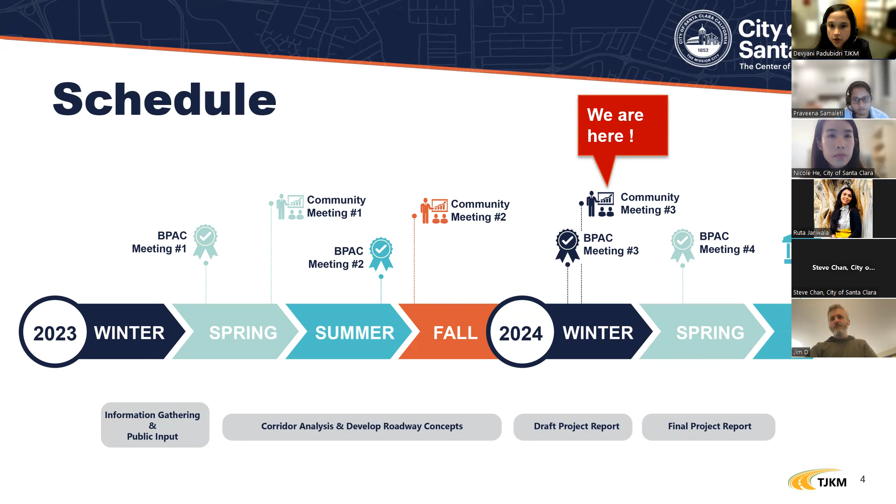The schedule for this project: we started in the winter of 2023. We've had 3 BPAC meetings so far and 2 community meetings. This is the 3rd community meeting. This will follow a 4th BPAC meeting and before the council adoption.

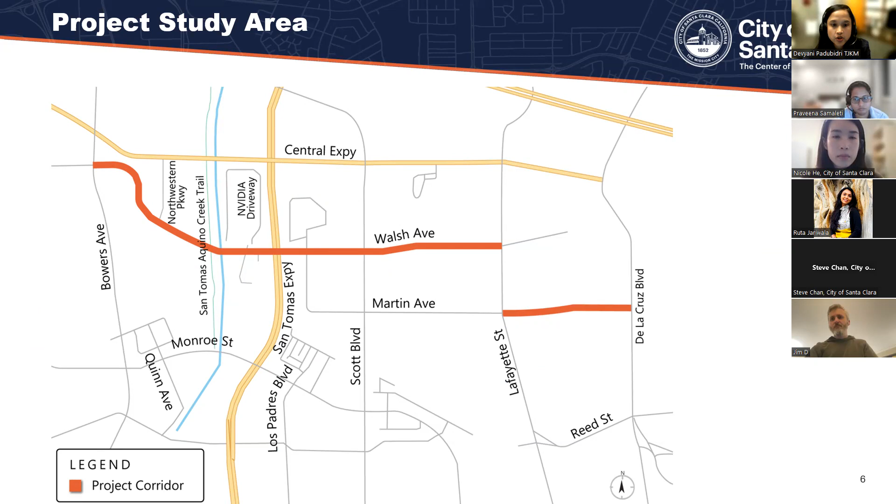The study area today: the project area spans on Walsh Avenue between Bowers Avenue and Lafayette Street, and on Martin Avenue between Lafayette Street and De La Cruz Boulevard.

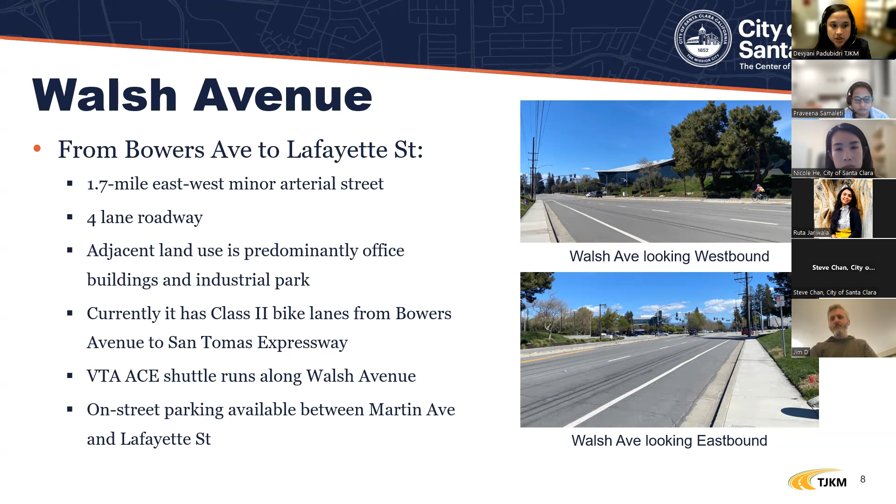The existing conditions: Walsh Avenue is a 1.7-mile east-west minor arterial. It's a 4-lane roadway, and the surrounding land use is predominantly office buildings and industrial parks. There is a Class 2 bicycle facility between Bowers Avenue and San Tomas Expressway currently. There is also an ACE VTA shuttle that runs on Walsh Avenue. On-street parking is available on both sides between Martin Avenue and Lafayette Street.

Martin Avenue, on the other hand, is a 0.5-mile east-west collector. It's also a 4-lane roadway. The surrounding land use is industrial and has parking on both sides.

The outreach efforts so far to publicize the project: we have put up a lot of yard signs along the corridor. We've also mailed out postcards inviting the public for community meetings. At pop-up events, we've handed out comment cards so that we can get feedback from the community. We've also set up a phone number to receive any voice messages on concerns along the corridor, and an email address to receive any comments and feedback based on the project.

Other outreach includes a project website on the city website. We also had a map input platform where the community could drop in points and let us know the areas of concern and report their concerns. We had set up a stall at the Bike to Work Day, and we were also at the Christmas tree lighting event and the Art and Wine Festival, where we got a lot of input on the different concepts that we had suggested, and in the community survey too.

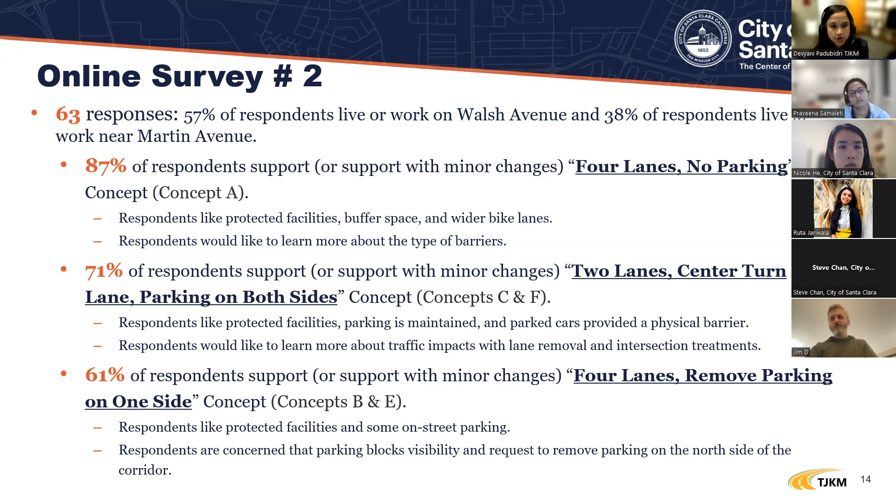We also asked the community what they liked about the concepts, and they said that they liked the proposed protected facility, the buffered spaces, and wider bicycle lanes. Some of their concerns included the type of barriers that were going to be used, the traffic impacts of lane removal and the intersection treatments, and also parking visibility.

Going over the design concepts and alternatives, we divided the study area into 5 sections. The first section is between Bowers Avenue and the 80 to 64 feet transition. The second section is between the 80 to 64 feet transition and the bridge section. Section 3 is the bridge section itself. Section 4 is between Martin Avenue and Lafayette Street. And the 5th section is on Martin Avenue, which spans from Lafayette Street to De La Cruz Boulevard.

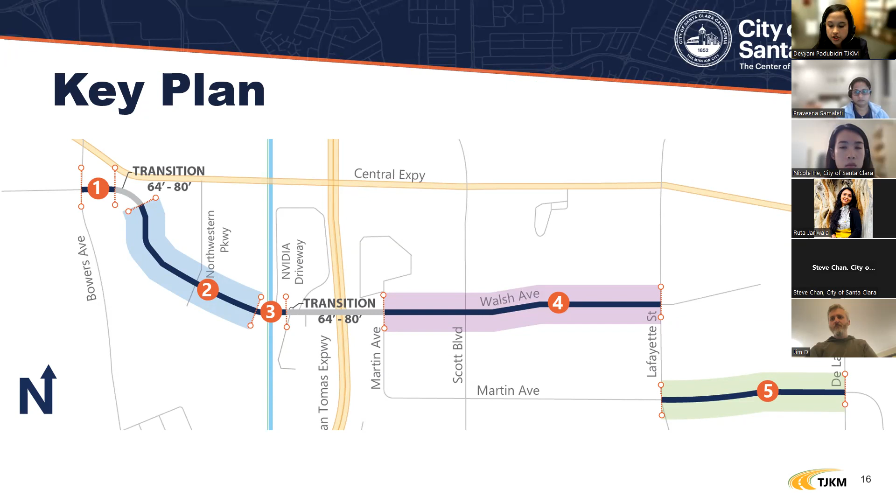Going over the Walsh Avenue sections to start. First, we will go over the existing conditions and then move into the concepts. The no build or existing conditions at section 1 are a 4-lane roadway with a center turn lane and no parking on either side. There is a 7 feet wide bicycle lane.

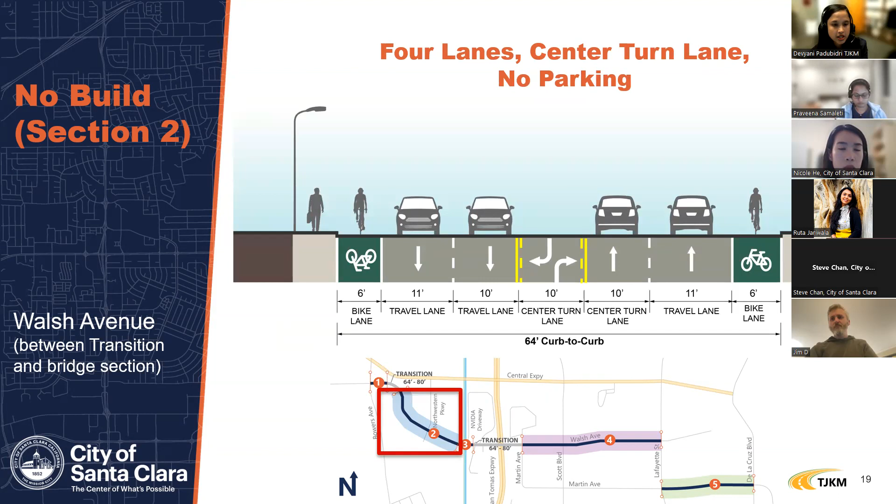Section 2, which is between the transition and the bridge section, is a 4-lane roadway with a center turn lane and no parking on either side. There's a 6 feet wide class 2 bicycle facility along this stretch.

Section 3 is the bridge section. It's a 4-lane roadway with a center turn lane and no parking on either side. The outermost lane is a sharrow, which means the bike and the cars share the lane.

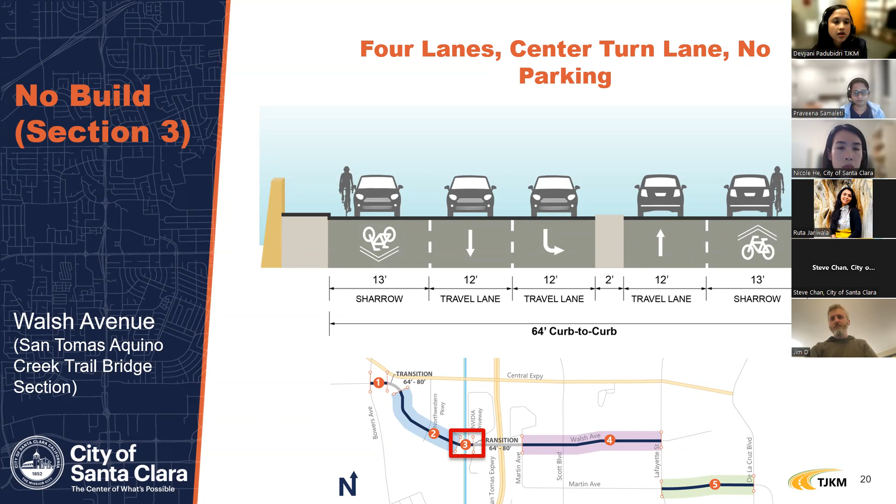Section 4 is a 4-lane roadway with parking on both sides.

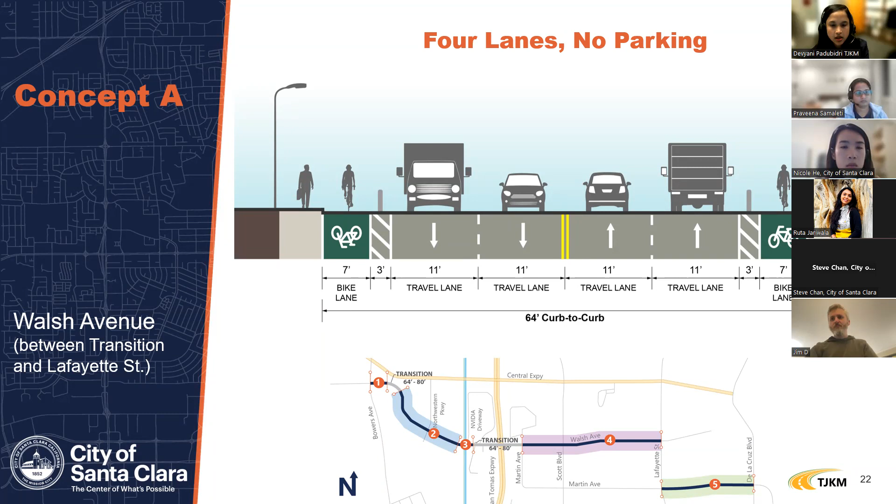Moving on to the concepts, our first concept for Walsh Avenue is a 4-lane roadway with no parking on either side. We have a class 4 bicycle lane, which is 7 feet wide with a 3 feet wide buffer.

Concept B is a 4-lane roadway with parking removed on one side between Martin Avenue and Lafayette Street. This is the stretch. For the rest of the stretch, which does not include parking, there is no parking at that stretch.

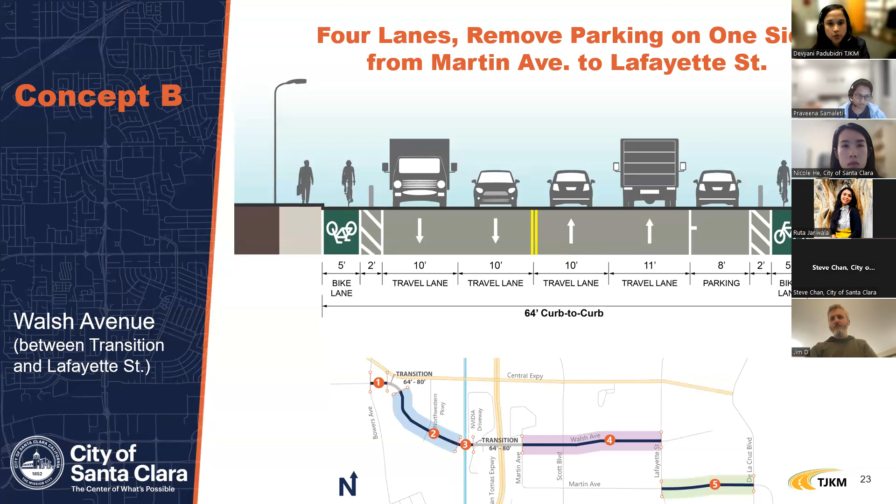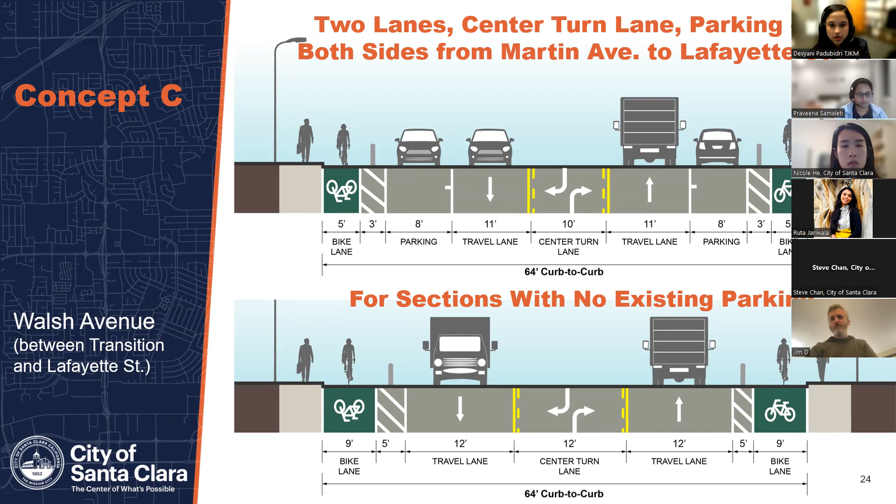Concept C is a 2-lane roadway with a center turn lane and parking on both sides from Martin Avenue to Lafayette Street. For the rest of the stretch where there's no parking, the section below is what would be implemented. The bike lane will be a little wider and the travel lanes will be wider as well.

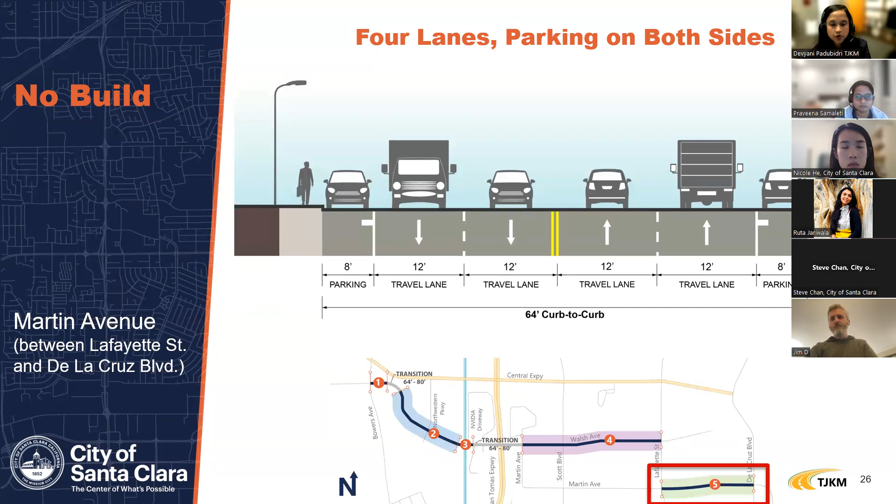Moving on to Martin Avenue, it's section 5. The existing conditions are a 4-lane roadway with parking on both sides.

Concept E is a 4-lane roadway with no parking on one side, and class 4 bicycle lane on either side, which is a 5 feet wide bike lane and a 2 feet wide buffer.

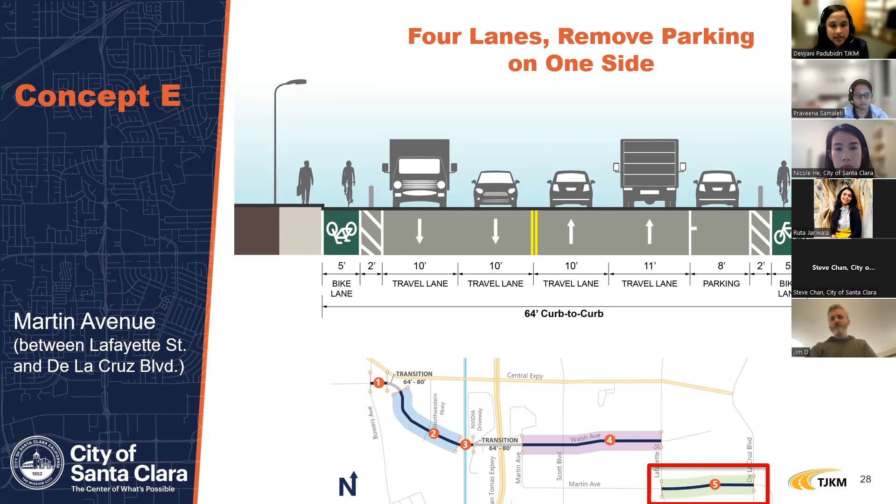Concept F is the third alternative for Martin Avenue: a 2-lane roadway with center turn lane, parking on both sides, and it incorporates a class 4 bicycle lane on both sides. It's a 5 feet wide bike lane with a 3 feet wide buffer.

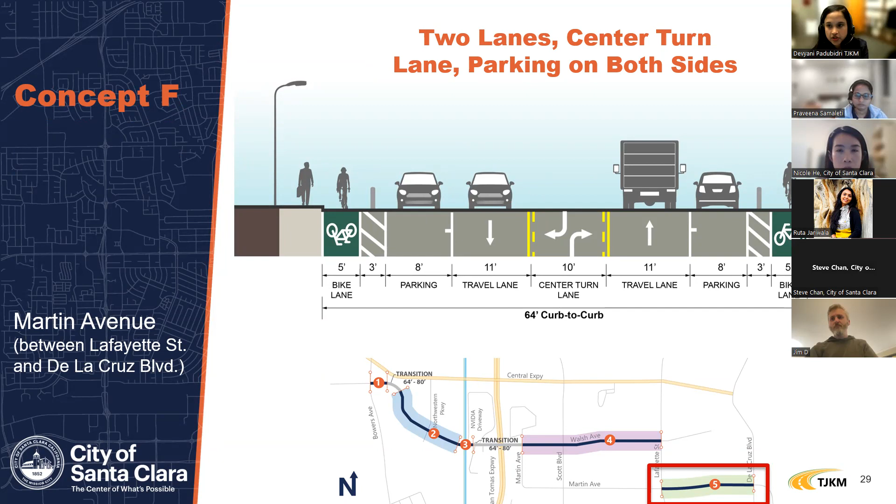As part of the analysis, we presented collision analysis in our previous community meeting. Based on the implementations and new proposed concepts, there will be some safety improvements along the corridor that would reduce collisions. Estimating the reduced collisions along the corridor, when we studied the collision data between 2018 and 2022, there were 41 vehicular collisions along the corridor and 1 bike collision.

As you can see in this table, with the implementation of concept A, B, or C with no parking, there is an estimated reduction of 27 collisions along the corridor. And when concept C, which is parking protected separated bike lane, is implemented, there would be a reduction of 29 collisions along the corridor.

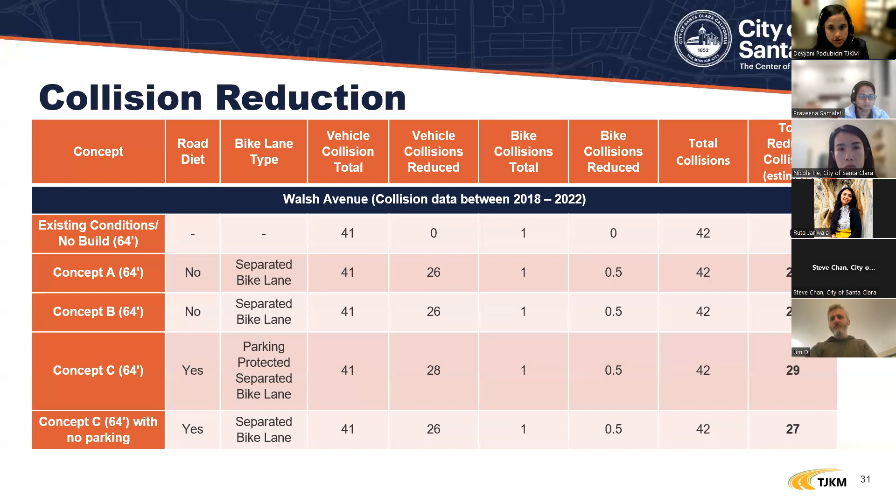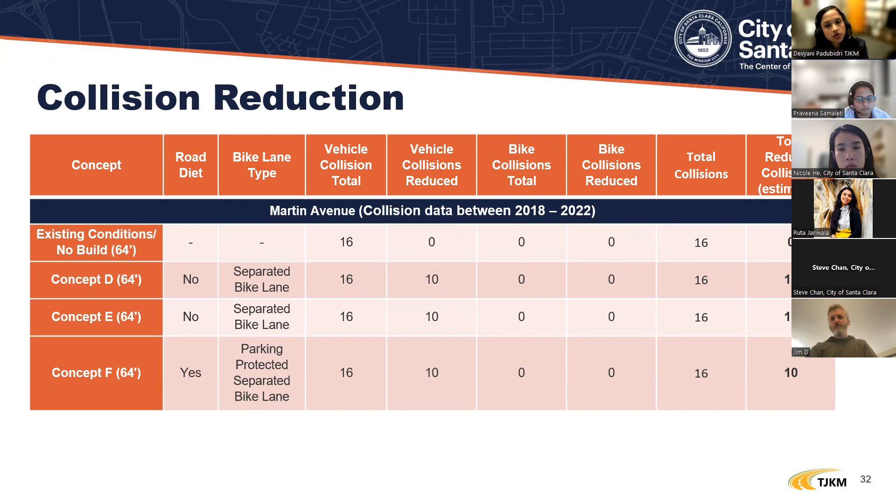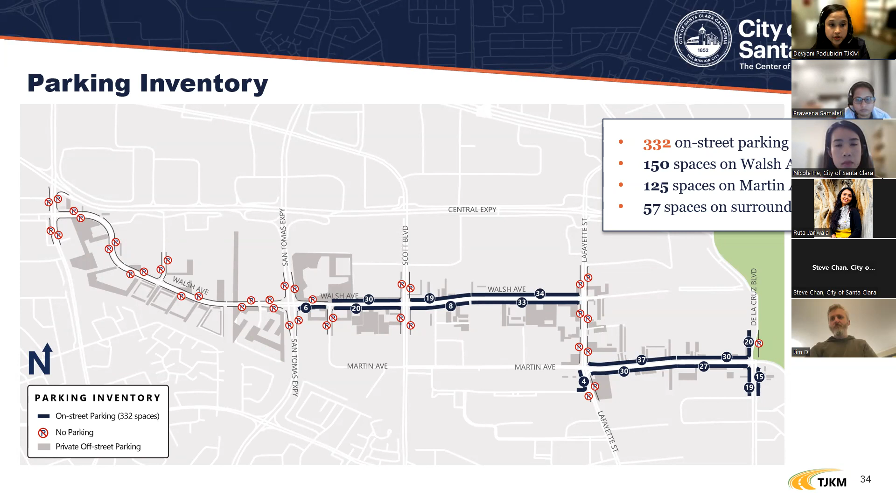Based on one of our alternatives, we have proposed removing parking on one side. We analyzed two scenarios where parking is removed on the north or south side. This diagram shows parking availability.

You can see that the stretch east of Scott Boulevard is our only concern area, where parking availability is less than 15%. But the surrounding streets do not have high occupancy, and any overflow could be accommodated there.

The same case applies if the parking from the south side is moved to the north side. The pinch point is east of Scott Boulevard, and besides that, the other areas have sufficient parking and can accommodate any overflow.

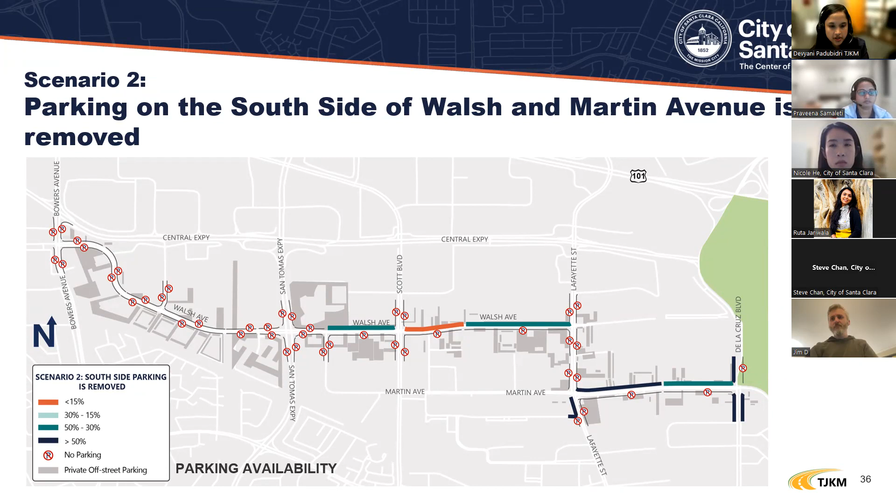This parking utilization table shows us that if Walsh Avenue north side parking is removed, the total estimated south side occupancy would be 84%. And if Walsh Avenue south side parking is removed, the total estimated north side occupancy would be 67%, which is still lower than our threshold, considered 85% in parking studies.

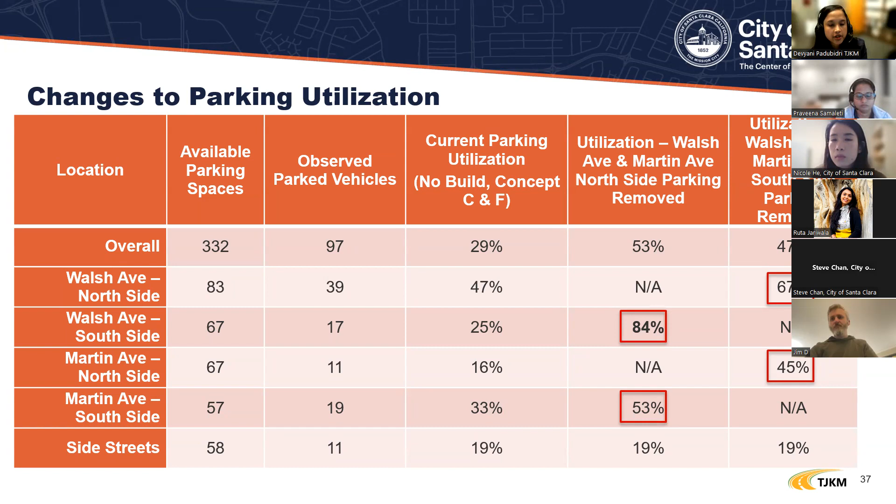On Martin Avenue, if the north side parking is removed, the south side parking would have 53% occupancy. And if the south side parking is removed, the parking on the north side would be 45%.

Traffic analysis. I would like to pass on control to Praveena, who will be updating us with the traffic analysis section.

Praveena, you're muted.

Sorry. Thanks, Devyani. Good evening, everyone. My name is Praveena Samaleti, project engineer for this project. Today, I'm going to present the traffic analysis results for this project to the community.

Next slide. The traffic analysis was completed at all the selected study intersections throughout the project area, and the intersections are evaluated using the City of Santa Clara Transportation Analysis Policy and guidelines. This uses the level of service that ranges from level of service A to level of service F.

Level of service D or better is the standard for roadways located within the City of Santa Clara. Level of service E or better is the standard for county facilities, that is county intersections and roadway facilities. We also conducted traffic counts in April 2023 and adjusted the counts to better represent pre-COVID traffic volumes.

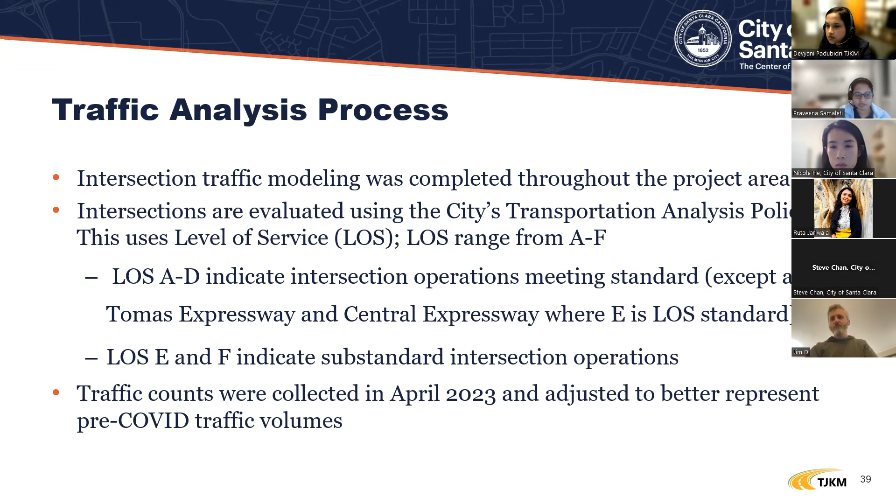Next slide. A total of 23 study intersections were analyzed for this project: 7 intersections on Walsh Avenue, 3 on Martin, 5 on Central Expressway, 2 on Reed Street, and 6 on Monroe Street, as shown in the figure.

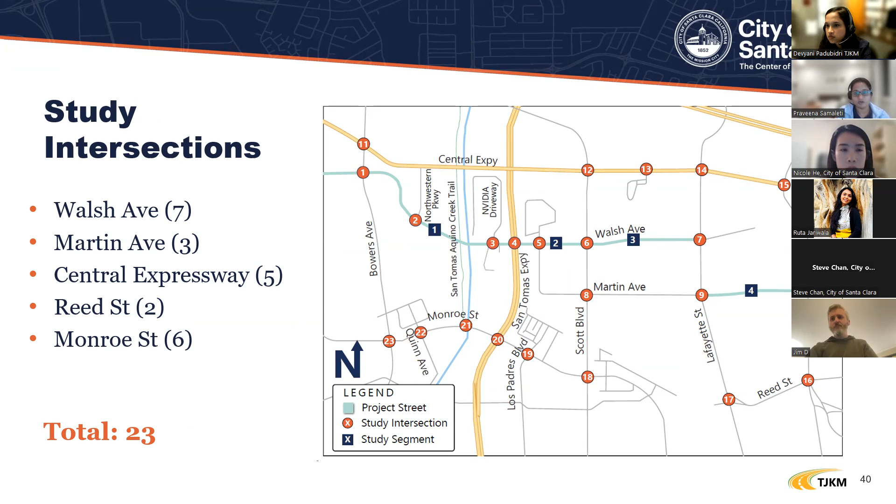As I have already mentioned, we analyzed a total of 23 intersections for the existing no-build, concept A, B, D, and concept E, and then concept C, which is a lane removal. As Devyani discussed, there is a lane removal on Walsh Avenue and Martin Avenue with bike facilities—that is concept C and concept F.

For the existing no-build and concepts A, B, D, and E during the AM peak, out of 23 intersections, 21 meet the standards and 2 do not. In the PM peak, 20 intersections meet the standards and 3 do not. We also looked at the midday peak and the weekend Saturday peak. For these two peaks, all 23 intersections meet the standards and continue to operate at acceptable level of service with the lane removal.

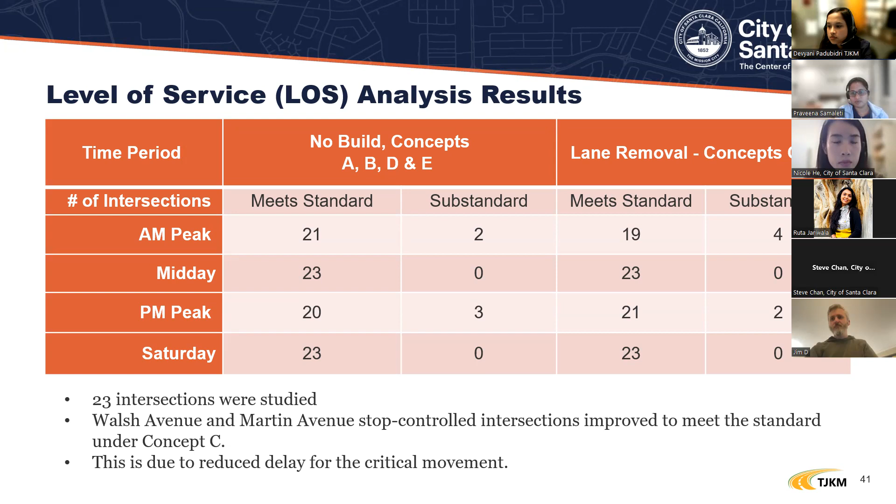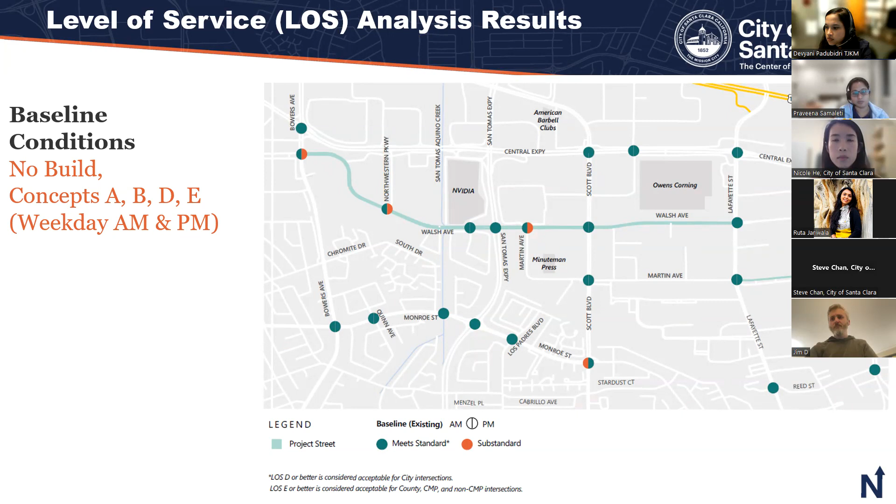As I already mentioned, 2 intersections during the AM peak—1 along Central Expressway and 1 along Monroe Street—and 3 intersections during the PM peak hour, all situated along Walsh Avenue, do not meet the standard.

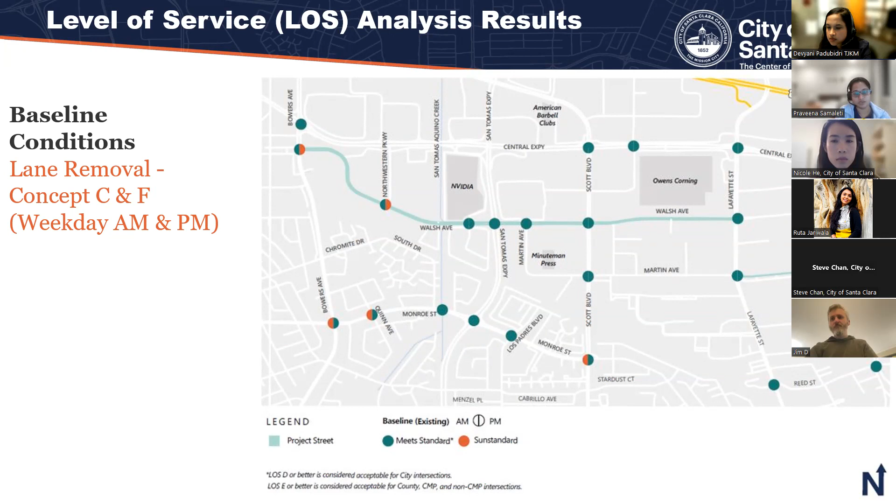Next, this is with the lane removal, that is concept C and concept F. Based on the level of service analysis results, 4 intersections during the AM peak hour—1 along Central Expressway and 3 along Monroe Street—do not operate at acceptable level of service. During the PM peak hour, only 2 intersections along Walsh Avenue do not meet the standards.

We have also conducted the travel time study for the Walsh Avenue study corridor and the Martin Avenue study corridor. For the Walsh Avenue study corridor, that is between Bowers Avenue and Lafayette Street. During the AM peak, Walsh Avenue westbound for the existing no build, concept A, and concept B, the total travel time is 5 minutes 51 seconds. When we go with the lane removal on that Walsh Avenue corridor, the travel time is going to increase to 7 minutes 53 seconds, meaning an increase in travel time of 35% during the AM peak.

When you look at the PM peak, there's a 17% increase in travel time. For Walsh Avenue eastbound, during the AM peak there is an increase of 10%, and during the PM peak there is an increase of total travel time by 26%. That is the peak direction.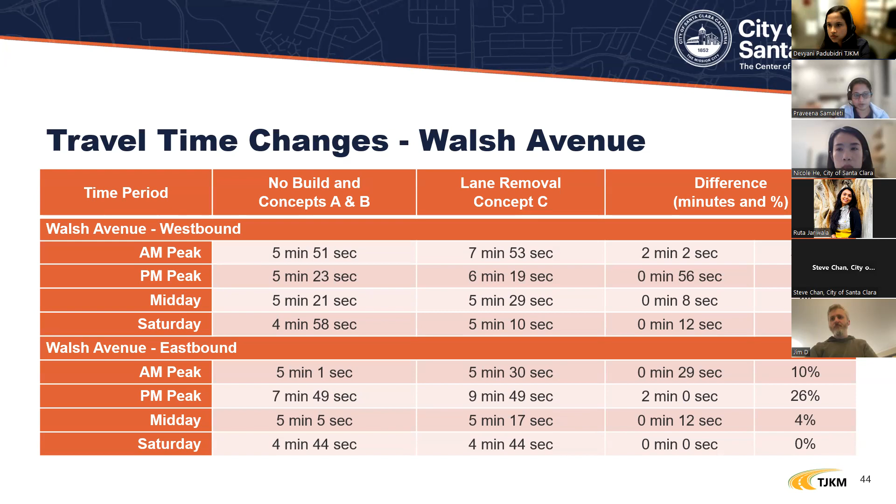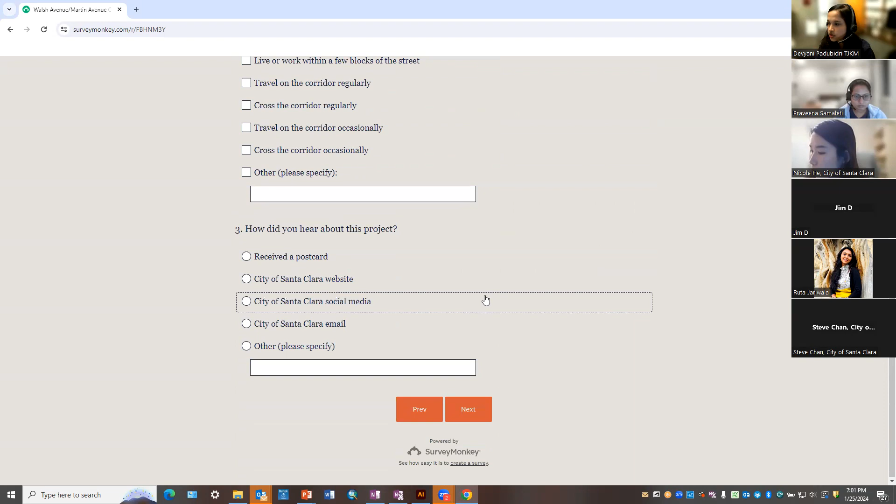So if you scan the QR code, or the city has also posted this, the link to the survey on their website, you would reach the survey, and you can find the concepts if you click these links. You can also find the details like email, website link, and stuff. First, we have a couple of questions regarding your relation with particular corridors, if you work there, if you travel, and how often you use it, and how you heard about this project.

We have the preferred concept section, where you could pick if you'd like the existing conditions for the first section, that's the 80 feet section between Bowers Avenue and the 80 to 64 feet transition. Here, you can either pick the existing section or the proposed section.

Moving forward to sections 2, 3, and 4, you could pick your preferred choices. Please note that you have to pick a first choice. It's okay if you don't pick second, third, or fourth choice. We would just consider that you do not support it, but the first choice would be a must.

This is for Walsh Avenue, and you can see all the concepts listed here. And this would be for Martin Avenue. Same thing, you'll have to pick your first choice. The second, third, and fourth choice is not mandatory. It would just be considered do not support.

And if you want to stay connected and receive updates, you can leave us your email ID and we will be sure to email you any updates. Thank you so much for joining.